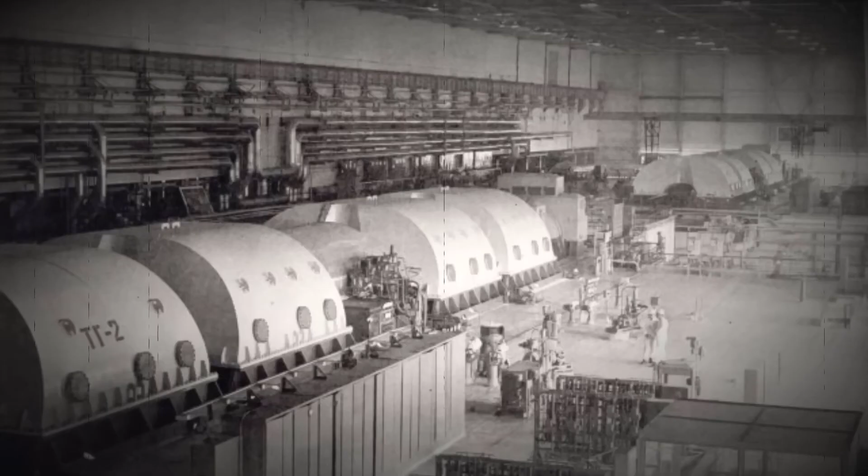The nuclear power plant had the first of its 4 reactors ready to operate in 1977, followed by number 2 in 1978. As a quick side note, Units 1 and 2 were the first generation RBMK-1000 reactors, and because of this they had slightly different core loadings and containment structures.

But the remaining 2 reactors at Chernobyl were of a slightly more modern second generation, named Units 3 and 4, which went online in 1981 and 1983 respectively. There were plans for another 2 units, but these were abandoned after 1986 when risks of contamination left the project untenable.

The nameplate capacity of Chernobyl Nuclear Power Plant was: Unit 1 at 1000 megawatts of electricity, Unit 2 at 1000 megawatts of electricity, Unit 3 also at 1000 megawatts, and the same with Unit 4.

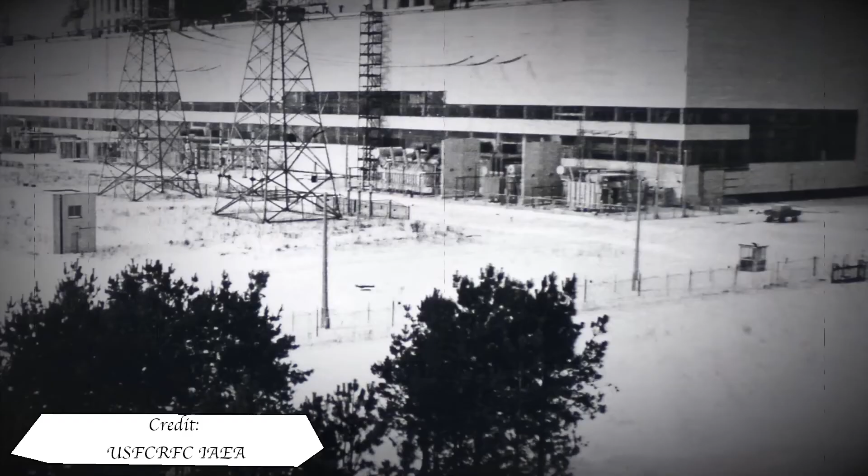In this video, I'll be focusing on the second generation RBMK, its design, and more specifically Unit 4. But I did look into the first generation in the Leningrad video.

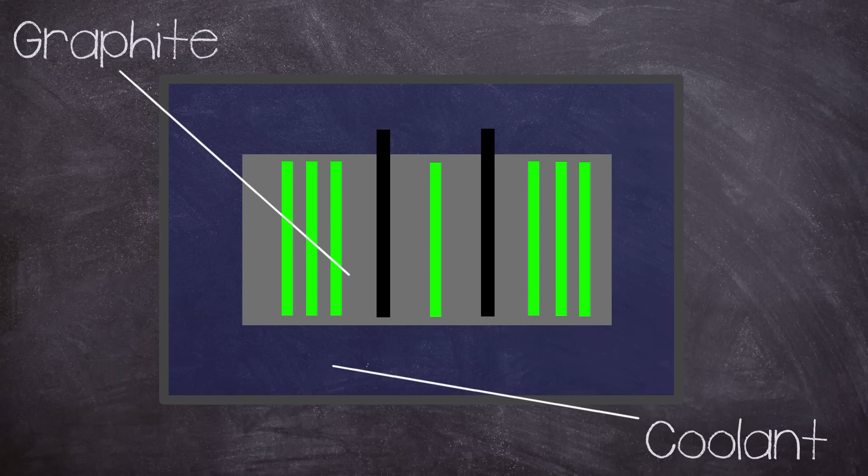The RBMK was a bit of a unique design in the reactor world, but it was a product of evolution rather than revolution, in that it used graphite to moderate the chain reaction with light water as a coolant. This combination allowed it to use lower enrichment uranium-235 for fuel, which is, not surprisingly, significantly cheaper than other reactor designs.

The RBMK had a very large core region consisting of a height of 7 metres and a diameter of 11.8 metres, which was mounted in a steel cylinder that was placed on top of a biological shield.

The steel cylinder was 16mm thick and had a diameter of 14.52 metres by a height of 9.75 metres, dug into the floor of the reactor building, inside a reinforced concrete lined pit.

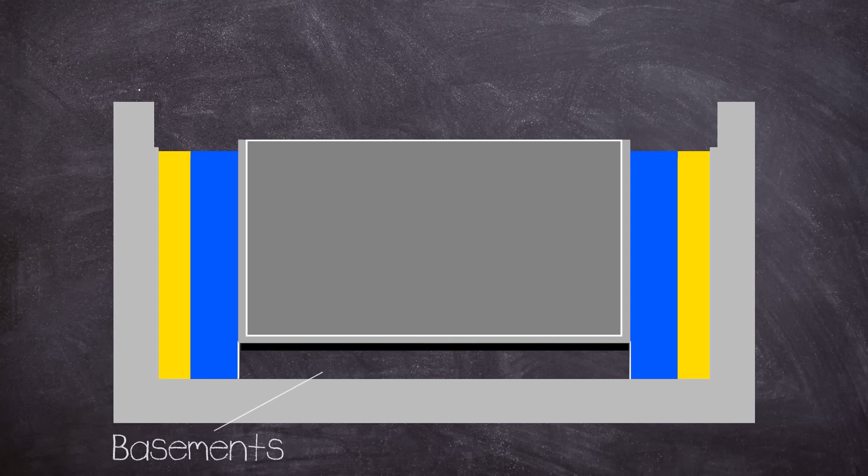Between the steel wall and the concrete lining, a water tank was placed, followed by a sand packing. Below the bottom biological shield, there were several basements used for pipework for the reactor core cooling loops.

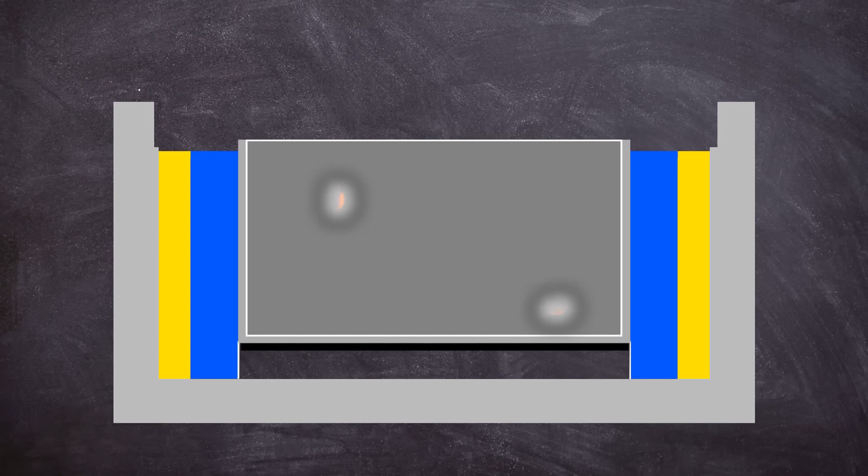The core consisted of graphite blocks sized 25 by 25 centimeters, stacked up with holes drilled through the center for fuel and control channels. The size of the core could cause issues in reactivity control during operation, but we will talk about that a bit later on.

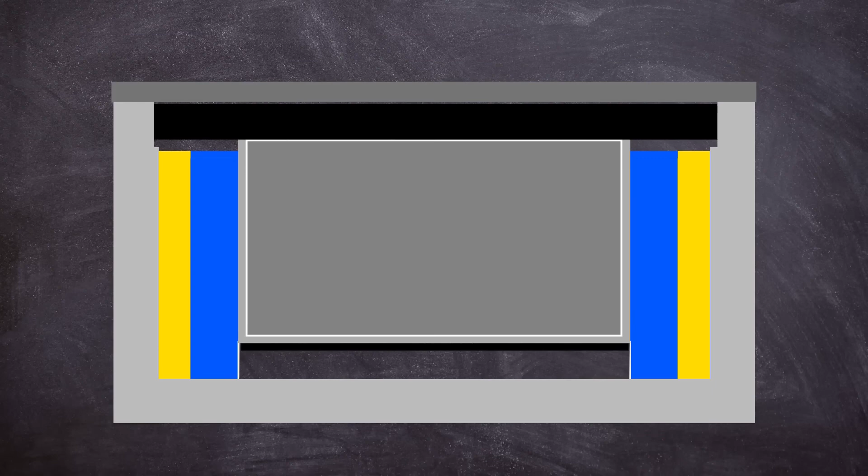On top of the core, another biological shield was placed with a steel cover on top of it, which formed the floor of the reactor hall. The cover plate was capable of withstanding a pressure build-up resulting from steam released by two simultaneous channel ruptures.

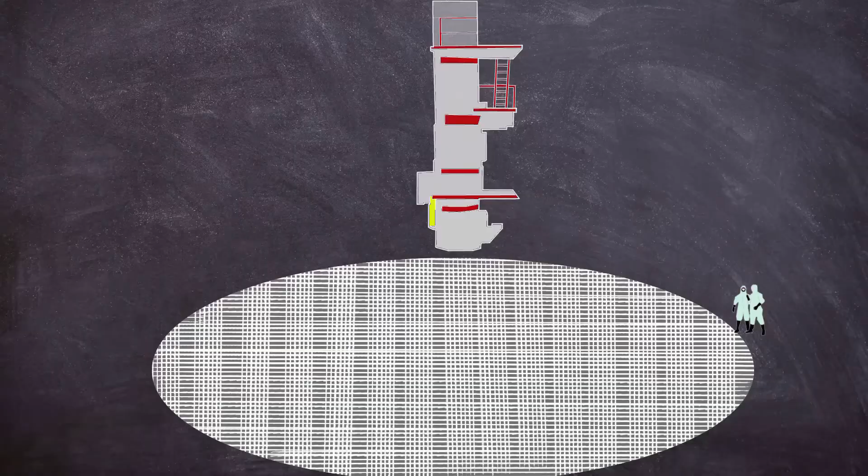All of this allowed the design to be refueled whilst in operation, which again helped with costs by reducing downtime. As a side effect of this, the confinement structure of RBMK reactors is less than ideal, as the tall refueling machine had to be housed inside the reactor hall. Because of the large floor space and subsequent roof requirements, the vast quantities of heavy concrete wouldn't have been architecturally, or more importantly, financially viable.

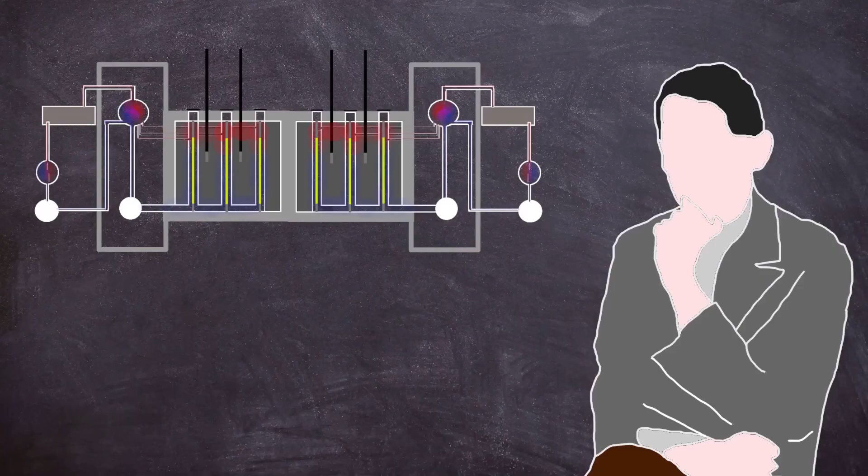The RBMK didn't have a prototype and was instead put straight into production, with the first reactor being installed in Leningrad in 1970. The original designs omitted confinement, instead claiming that the fuel being in its own channel with flowing cooling water was an acceptable alternative. The main takeaway from this is confinement was poor, resulting in disastrous results in the case of a fission product release.

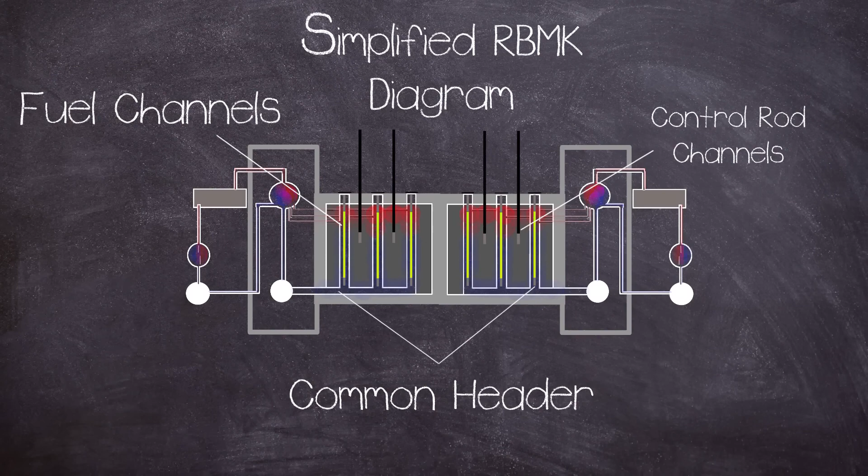The coolant was pumped through the core, from the bottom common header through high pressure tubes that jacketed the fuel elements, where the water would boil. Coolant water also circulated in the control rod channels. The primary cooling of the reactor was via two separate cooling circuits, one for each half of the core, meaning everything was doubled up, leading to four main circulating pumps, which were three operating, plus one standby per loop.

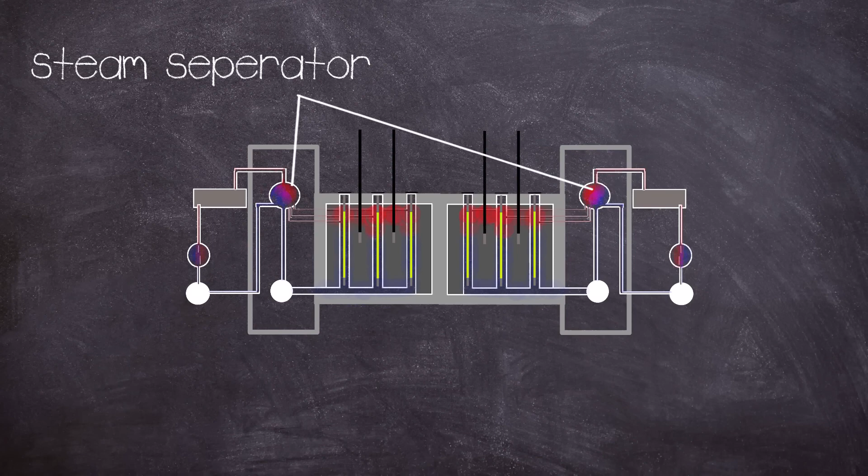As the coolant boils, it exits the top of the core and is passed through a water steam separator, which takes the steam to high then low pressure turbines which generate the electricity. The steam is then passed through a condenser that turns it back into water to be pumped back into the core, completing the primary cooling circuit. The condenser is cooled by using a separate secondary water cooling circuit, meaning the primary cooling circuit is self-contained.

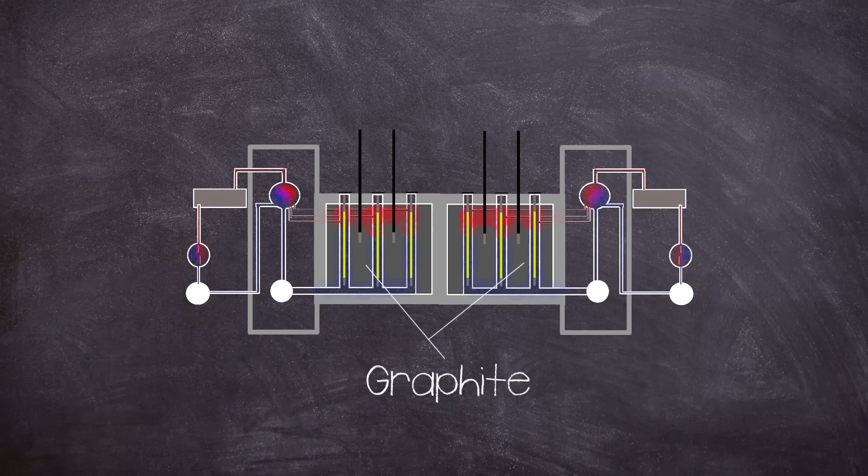As mentioned before, the reactor employed graphite blocks for its moderator. A moderator is used to reduce the speed of fast neutrons released from fission, so they can better facilitate a chain reaction, getting more use out of the fuel. Ideally, moderators work without capturing any neutrons, leaving them as thermal neutrons. But where the design has its potential flaw is having a separate coolant that can also absorb neutrons, which can make the reactor unstable in certain situations.

This brings up the big elephant in the room, and that is void coefficient. It wasn't just the graphite that had moderation characteristics, but the coolant water as well, because H2O naturally slows down and absorbs neutrons. This brings a problem for the reactor, as with the increase in temperature from fission, the coolant boils off into steam, known as voids, i.e. a bubble that does not absorb neutrons. With the steam not absorbing neutrons, this leads to an increase in the power of the reactor.

The RBMK did not rely solely on its coolant for moderation, because that's what the graphite was for, but the water did absorb neutrons, meaning that as it boiled off, the operators had to compensate for this with the control system. If not properly managed, an incident of a runaway can happen as the coolant heats up, increasing reactivity, heating up the coolant more, creating more steam, leading to greater reactivity, and this is called a feedback loop. During this reactor state, more and more neutrons are produced and their density grows exponentially fast, creating a positive void coefficient. The risks of a feedback loop were greater at certain power levels, but this will be covered later on.

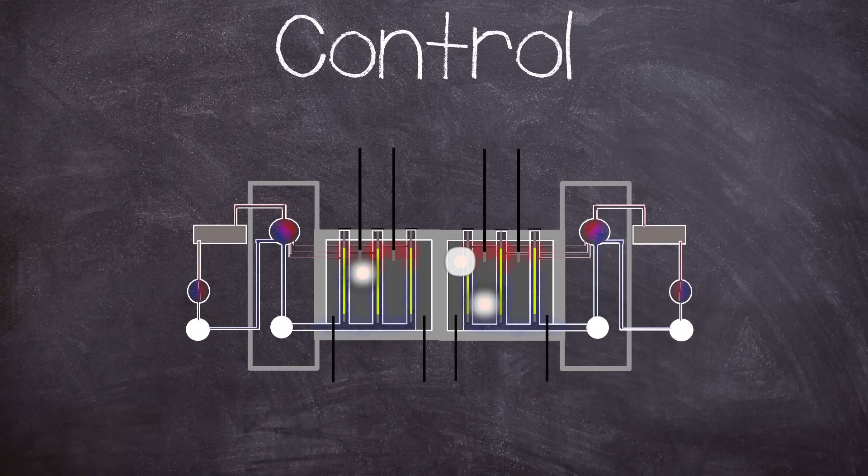Now this leads us quite neatly onto reactor control. As I said before, the core region was rather big, and this meant that the RBMK was kind of like multiple smaller reactors in that hotspots could occur which needed to be individually managed.

And this leads on to the strange design choice for both top-loaded and bottom-loaded control rods. There were 167 top-loaded rods and 32 shortened rods loaded via the bottom, and another 12 automatic controls inserted from the top.

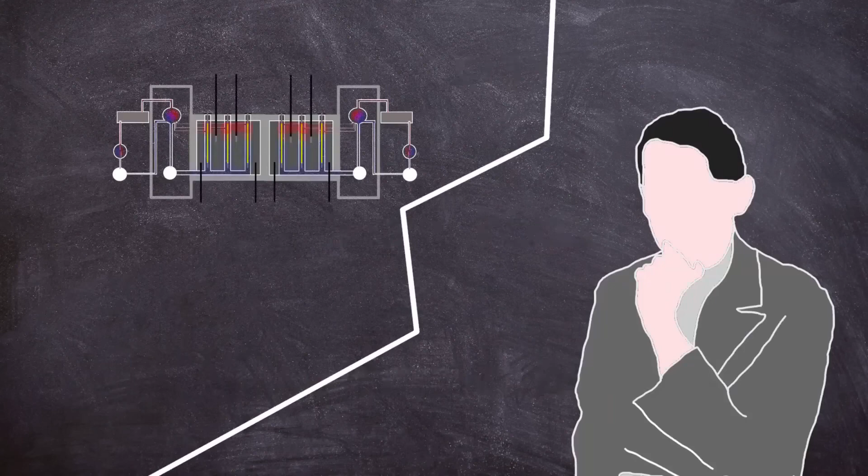The shortened rods were used to manage axial power distribution, which was necessary due to the core size to manage hotspots.

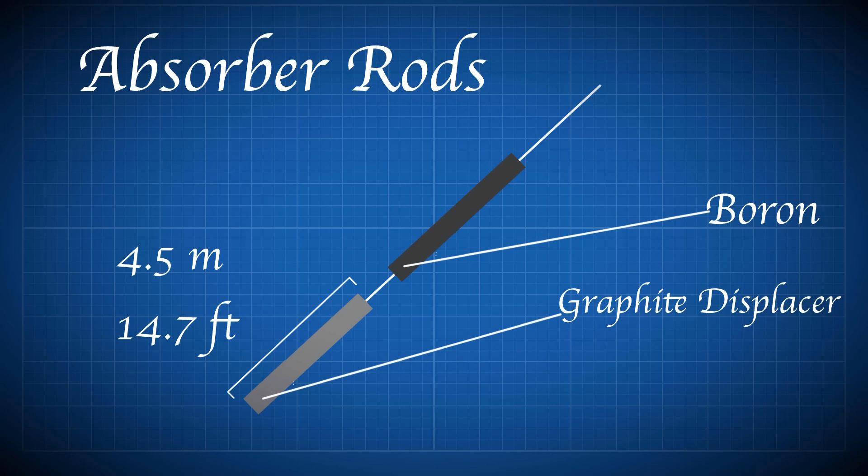The main control rods had a 4.5 metre long graphite rod termed a displacer attached to the end of the length of the control rods, except for the 12 rods that were used in automatic control.

The displacer connected to its rod via a telescope, with a water-filled space of 1.25 metres separating the displacer and absorbing rod. This was to stop water filling the space left behind by the control rod after it has left the core region, which would parasitically absorb neutrons.

Because removing one neutron absorber in the form of a boron control rod to be replaced by another neutron absorber, albeit weaker, in the form of H2O, kind of defeats the point of a control rod. Thus, if there was no displacer, then more control rods would be needed, as each one would have less of an effect on the reactivity of the core.

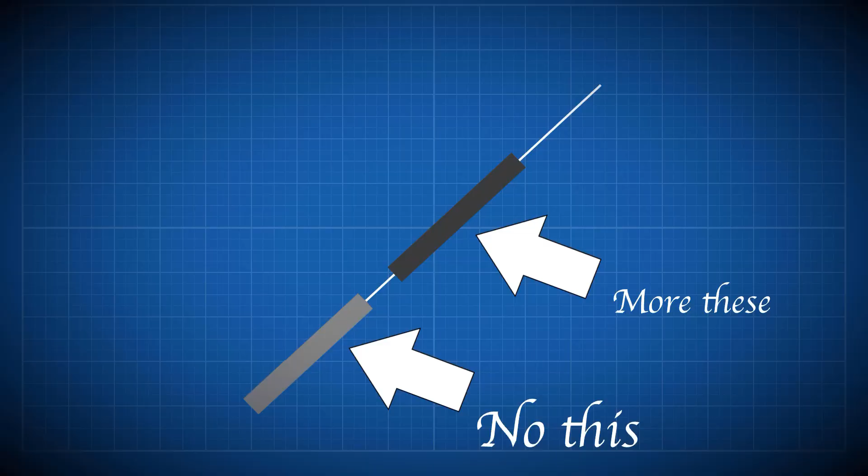The dimensions of the rod and displacer were that, when the control rod was fully extracted, the displacer sat centrally within the fueled region of the core, with 1.25 metres of water at either end. But this setup in certain situations could cause a positive scram effect.

On receipt of a scram signal causing a fully withdrawn rod to fall, water was displaced from the lower part of the channel as the rod moved downwards. This caused a localised insertion of positive reactivity in the lower part of the core.

This was because the RBMK had a high moderator to fuel ratio, meaning the lower part of the core would experience a spike in reactivity as the graphite displacer entered it, as it replaced the neutron absorbing water with a neutron moderating graphite. But this situation was only dangerous at certain power levels of the reactor, which was meant to be mitigated by the knowledge and training of the operators, and also importantly by their management.

Part of this mitigation was by having an operating reactivity margin. The ORM is the number of equivalent control rods of nominal worth remaining in the core.

The total time required for a scram, or insertion of the emergency control rods into the core when starting from the upper limit stop switches, was around 18 seconds, which was relatively slow, but this was due to the size of the control rod channels and the fact that the coolant had to be pushed out of the way.

The scram could be initiated by the control system or manually via the AZ5 button.

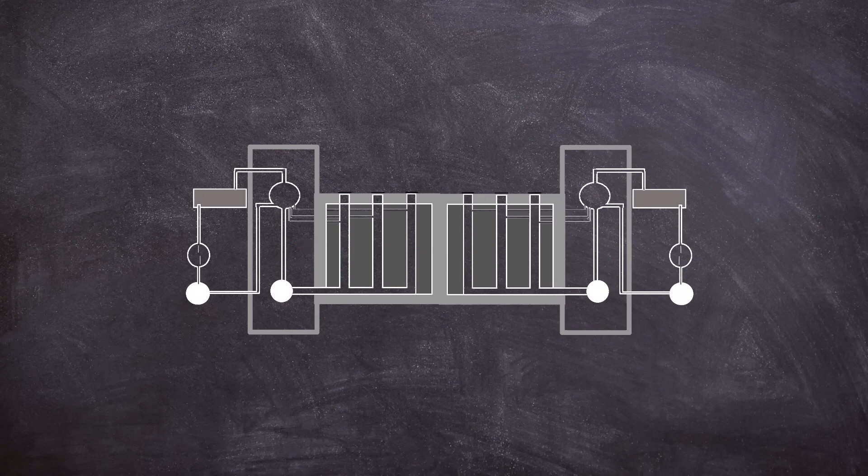This meant that low power operation below 10% had to be done by the operators relying on experience and feel when monitoring the equipment. But manual low power control was only really intended for a cold startup, so to speak, when the reactor was free of the neutron absorbing poison xenon-135.

Right, I need to mention about neutron poison, as it will play a vital part later on, and was also a contributory factor in another RBMK incident, the meltdown in Leningrad in 1975.

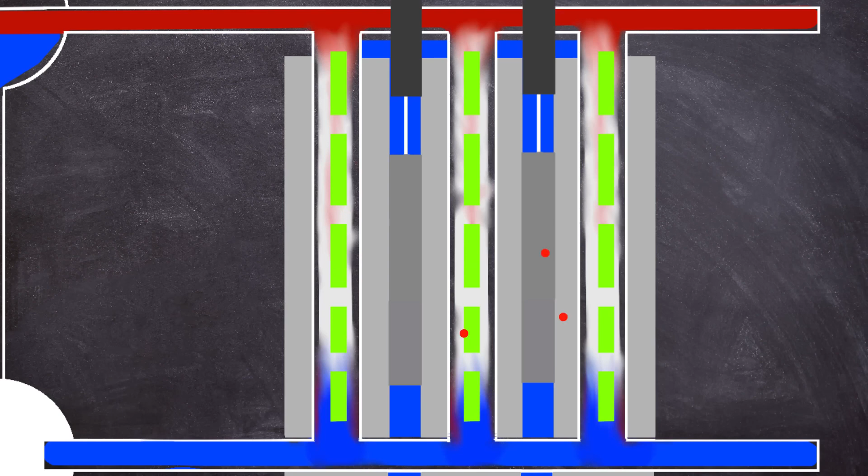During fission, some products are given off, one of which is xenon-135, which has a high neutron absorption rate, which is okay when the reactor is in a steady state, as it burns off this undesired byproduct, as poison burning is proportional to reactor power.

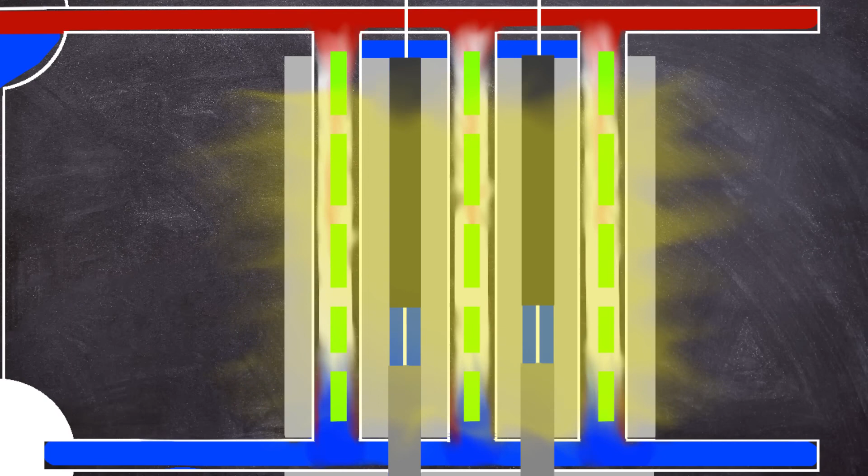But when the power of the reactor is decreased, the xenon-135 is not burned off, and can shut down the chain reaction by absorbing too many neutrons. This is known as an iodine pit.

All is not lost, as xenon-135 has a relatively short half-life of around 9.2 hours, so a reactor core is considered poison-free after several half-lives have passed. But this is not good from an economic standpoint, as the unit would be shut down for a few days.

Which is where good management is meant to come into effect, where safety is prioritised over money, but in the former USSR, taking a reactor out of action for a few days could have a detrimental effect on one's career longevity.

Our story starts with an issue inherent to all reactors of any type, a thing called decay heat. You see, reactors produce heat from fission, which is used to create steam to drive the turbines for electrical power. Some of this power is taken to drive the electronically operated coolant pumps, which keep the coolant flowing through the core. The reactor needs around 28,000 cubic metres per hour during full power operation.

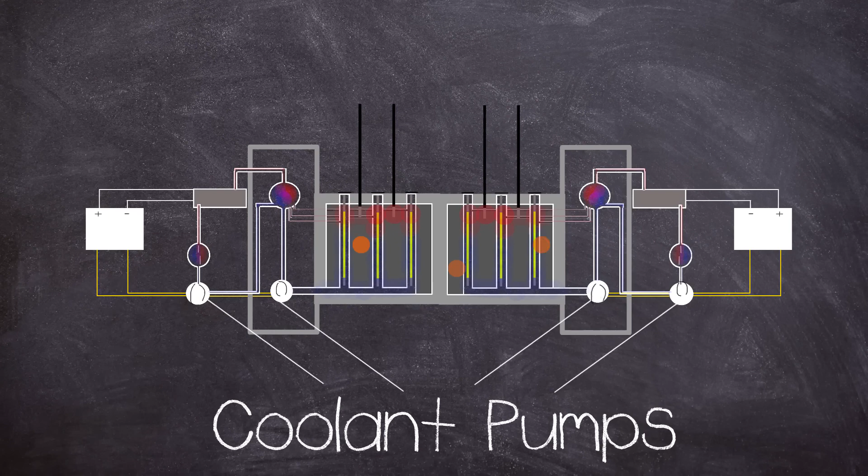Some heat is produced not directly from fission, but instead from the products produced from the chain reaction, and this is known as decay heat.

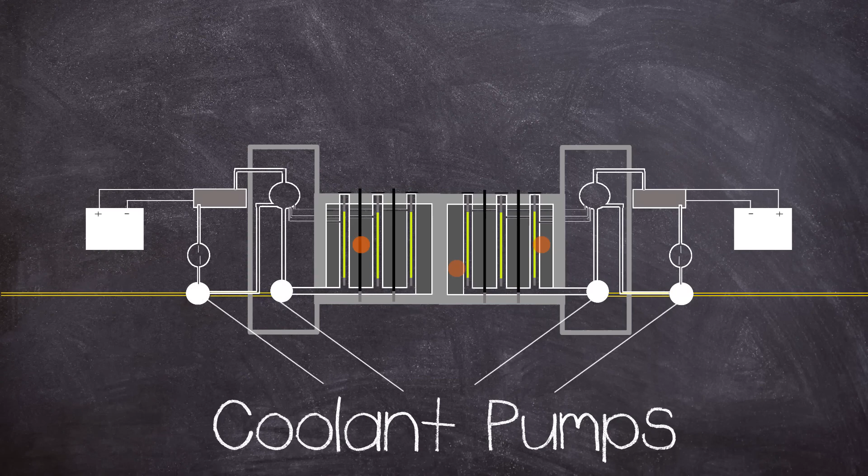And when the reaction stops, this continues, at least for a while after shutdown. During power operation, this is fine as electricity is being produced, but after shutdown, the pumps need to keep circulating to remove the decay heat. Usually the electricity needed for the pumps can be drawn from the national grid. But what about if there is a full power outage?

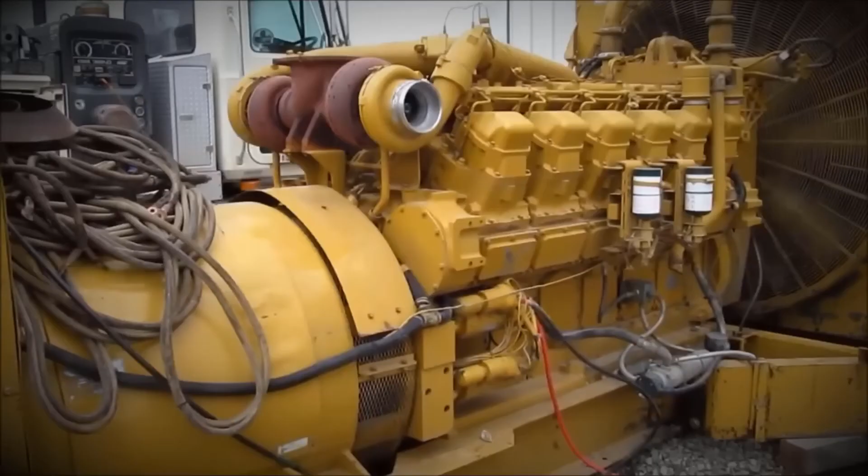Then backup is needed. This presents a problem. If for any reason, being scheduled or not, a reactor is shut down and there is a power cut, how will the pumps keep working? Well, the solution is pretty simple, and that is a diesel backup generator.

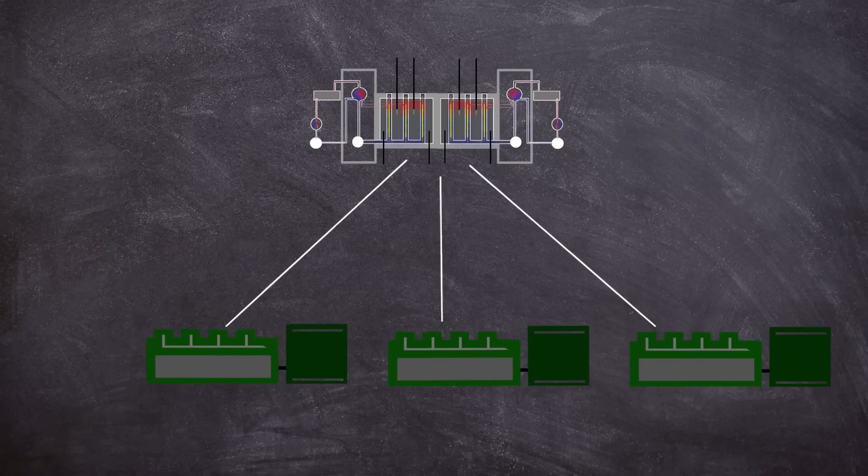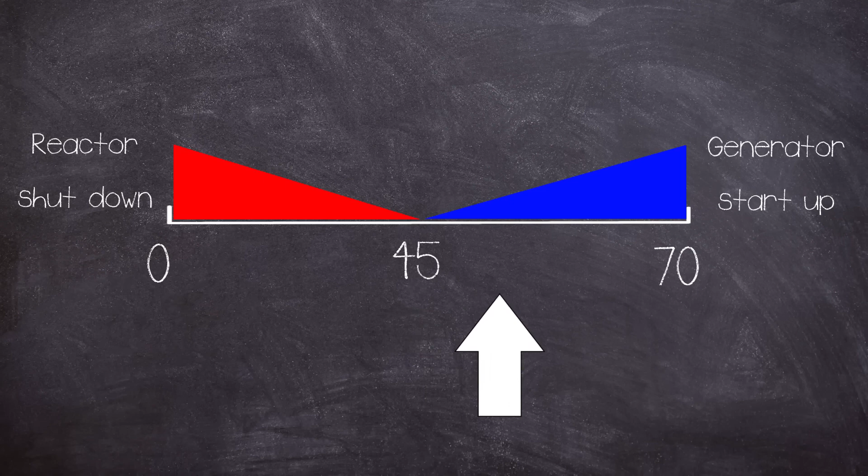Each of Chernobyl's reactors had 3 backup diesel generators, which took in excess of 70 seconds to reach full power. Too much time in the event of a full power cut. In theory, some of this time could be covered by the spool down of the turbo generators, which was theorised to cover around 45 seconds. Not the full time needed, but possibly enough to prevent fuel melting.

To prove that this could work, it had to be tested out, and in 1982, 1984 and 1985 this was attempted, but all tests failed to produce the electricity needed to run the pumps. The test was to be conducted again in April 1986.

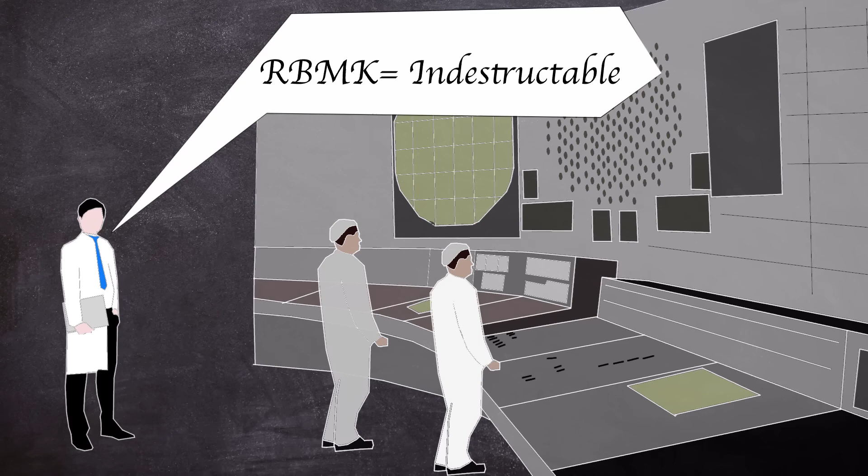Strangely, the test procedure that was written hadn't taken into account the eccentricities of the RBMK reactor, especially at low power outputs. The test was to be conducted during a routine shutdown. For the test to go ahead, some vital systems had to be switched off, most notably the active-passive emergency cooling system used in a loss of cooling accident. This required the chief engineer to sign it off.

In preparation for the test, the following had to be set up. The reactor power was to be reduced to between 700 and 1000 megawatts of thermal energy, and the steam turbine generator was to be at normal operating speed.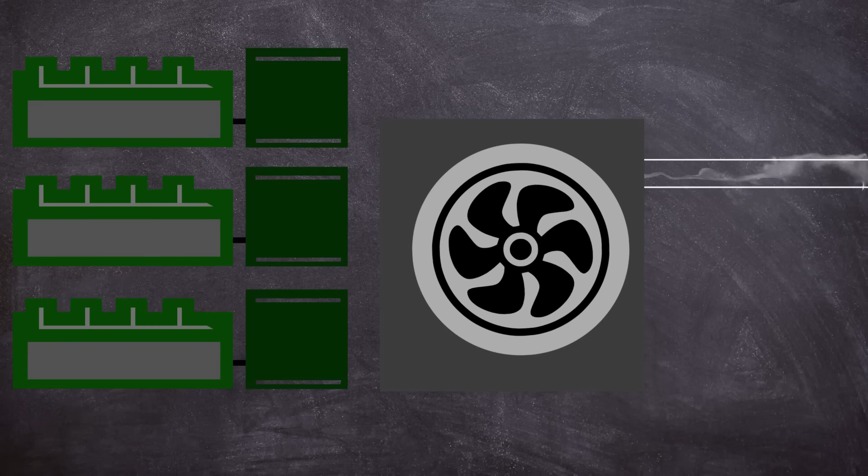After all this was sorted, the preparations for the electrical test could go ahead. The steam supply to the turbine generator would be closed off. The turbine generator performance would then be monitored to see if it could bridge the power for coolant pumps until the emergency diesel generators took over. When the emergency generators supply electrical power, the turbine generator will be allowed to continue freewheeling down. The normal planned shutdown procedure of the reactor was then to be completed.

The date of the test was to be the 25th of April 1986, 15 minutes past 2 p.m, completed by the day shift. As such, the operators were briefed on the procedure and a team of electrical engineers was present. At around 1 a.m. on the 25th of April, the reactor was gradually powered down to around 50%, in time for the day shift.

At 1:05 p.m, the turbo generator TG7 was switched off. The 4 main circulating pumps, 2 electrical feed water pumps and other electrical equipment that was connected with this turbo generator were switched over to bus bars for the turbo generator TG8.

The ECCS was disabled with the correct authorization from the chief engineer, but just after 2 p.m, the Kiev electrical controller asked for the test to be postponed to cover the evening electrical peak demand. The request was due to another power station in the region unexpectedly going offline. Chernobyl's director agreed and the test was pushed back, but the ECCS was not reinstated.

The status of the ECCS showed the lack of safety culture at the plant. Although the system wouldn't really be a factor in a disaster, it highlights the management culture at the time.

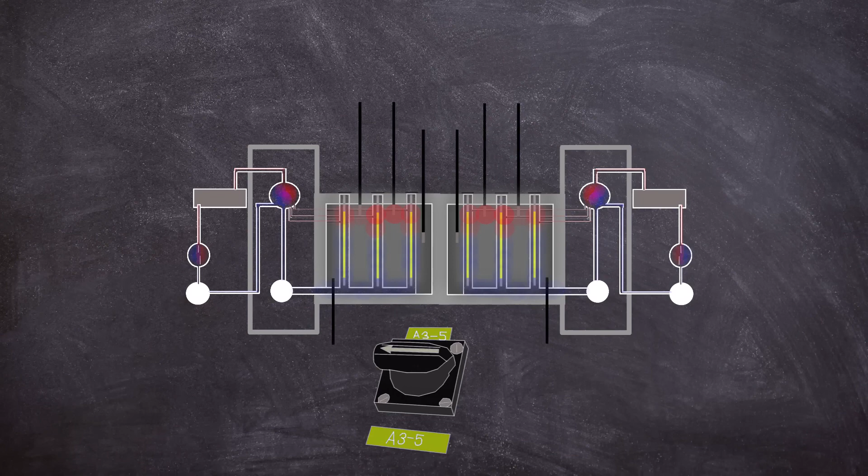At 1:23 in the morning, the actual test had now begun. The command given to stop the valves for turbine number 8 closed and the rundown operation started. As the turbines spooled down, the power to the feed water pumps slowed, increasing the temperature of the coolant, creating more voids. With less water absorbing neutrons, the power of the reactor began to rise.

A feedback loop was beginning to start in the lower part of the reactor core. The operators pressed the AZ5 button in response to the worrying increase in power, and the control rods started their travel into the reactor core.

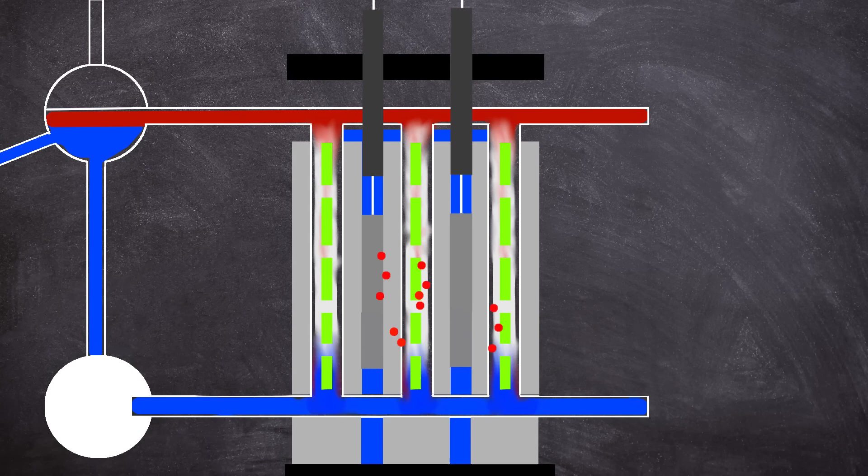As the control rod attached graphite displacers moved down to the lower part of the core in their control channels, the neutron absorbing water was pushed out of the way, creating a momentary spike in power, replacing it with neutron moderating graphite. During the spike, some of the fuel rods ruptured, blocking the control rod columns, stopping the control rods

at 1/3 insertion. This left the graphite water displacers stuck in the lower part of the core, increasing the runaway power excursion. Within 3 seconds, the reactor power rose to 530 megawatts of thermal energy. In the control room, a few shocks were felt, and the control rod indicators showed that the insertion had stopped.

As the channel pipes began to rupture, mass steam generation occurred as a result of depressurization of the reactor cooling circuit. Fission materials leaked into the coolant, and steam pressure grew inside the core as the coolant boiled off, creating a greater neutron population. The reactor power hit 30,000 megawatts of thermal energy, although it is thought that the power could have gone much higher than that during the excursion.

The steam blew off the top steel cover and top biological shield of the reactor as more than the 2 designed fuel channels failed, releasing debris into the reactor building. This was what would later be described as the first explosion, but it would not be the last.

A second, more powerful explosion occurred between 2 and 3 seconds later, and this destroyed the roof and ejected superheated pieces of graphite out of the reactor hull, peppering the area around the building with shrapnel. Some red-hot material fell onto the roof of the machine hall and started a fire. It is thought that around 25% of the core material was ejected.

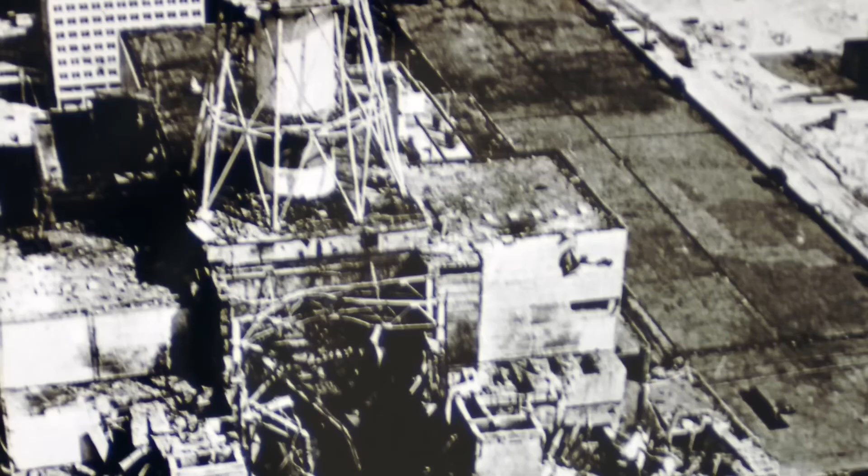Some of the debris that was ejected started a fire on the roof of Reactor 3's building, but insanely the unit wasn't shut down straight away.

Instead, the operators were told to take iodine tablets and don respirators. At 1:45 in the morning, the first responders from the Chernobyl fire team arrived under the command of Lieutenant Vladimir Pravik and began trying to extinguish the flames on Unit 3's roof. All around them lay pieces of Unit 4's graphite core.

The firefighters were only aware of the fire, and because of this they didn't have any radiological protective clothing on. As they worked, they breathed in some of the fission material in the form of dust and were exposed to deadly radiation. Many would come down with acute radiation sickness shortly after. Some of the first responders felt a metallic taste in their mouths, similar to what others had reported post-exposure, for example from the victim of the Wood River Junction criticality.

The fires on the roofs of Units 3 and 4 were under control between 2:10 and 2:20 in the morning, and the fire was fully put out at 5 o'clock in the morning. However, the graphite fire in what was once Unit 4 continued to burn, expelling its radioactive plume of dust, steam and smoke into the atmosphere. The operators started to pump water into the core, but this did little to bring the situation under control.

The estimated dose of 5 to 6 Röntgens per second was experienced around some parts of the reactor building, equivalent to more than 20,000 Röntgens per hour—enough to give a lethal dose in minutes. Effective dosimeter monitoring of the operators was unavailable when the two 1000 Röntgen per second capable meters became inoperable. The only remaining meters maxed out at 0.001 Röntgens per second, which immediately read off the scale when used, meaning no one in the control room actually knew what dose they had received. The poor awareness of the dangers they were in left the operators believing that the core was still intact.

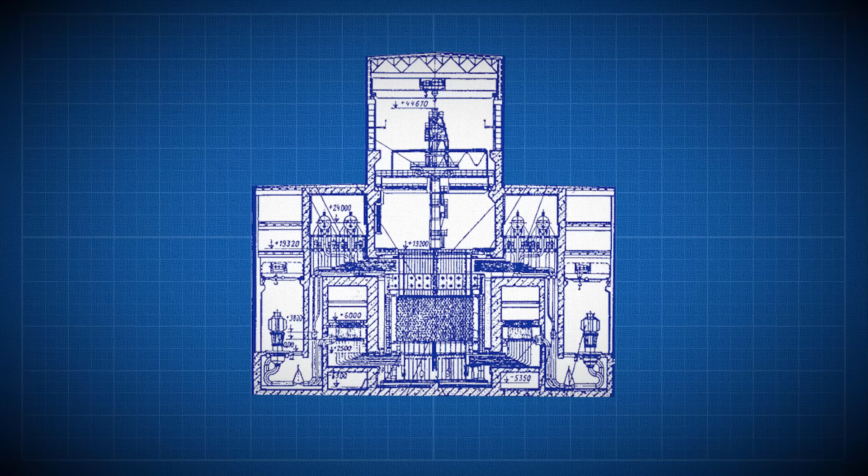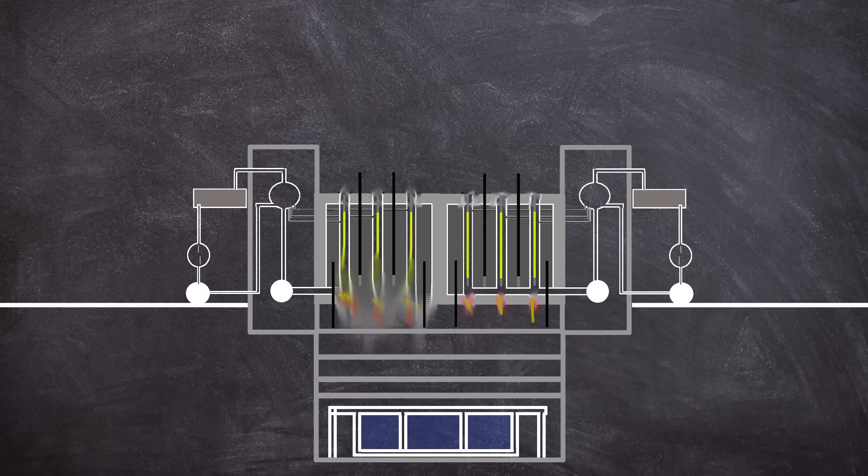Another steam explosion. The fuel from the core was melting towards the flooded basement. But below that was more water from the bubbler pools, a large water reservoir for the emergency cooling pumps and pressure suppression system.

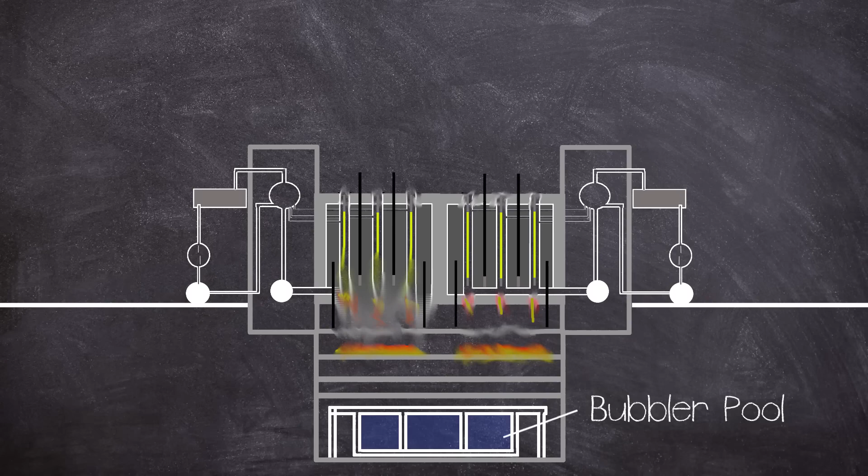Engineers Alexei Ananenko and Valeri Bezpalov, and supervisor Boris Baranov, volunteered to empty the bubbler pools. This was done by valves controlling sluice gates, housed in a room that had now become flooded. All three men donned protective suits and breathing equipment and made their way down the corridor.

The men were successful and the bubbler pools began to empty. Surprisingly, all three survived, not only that day but continued to live long after the disaster, averting the immediate steam explosion. But that wasn't the end of the worry of a deadly explosion.

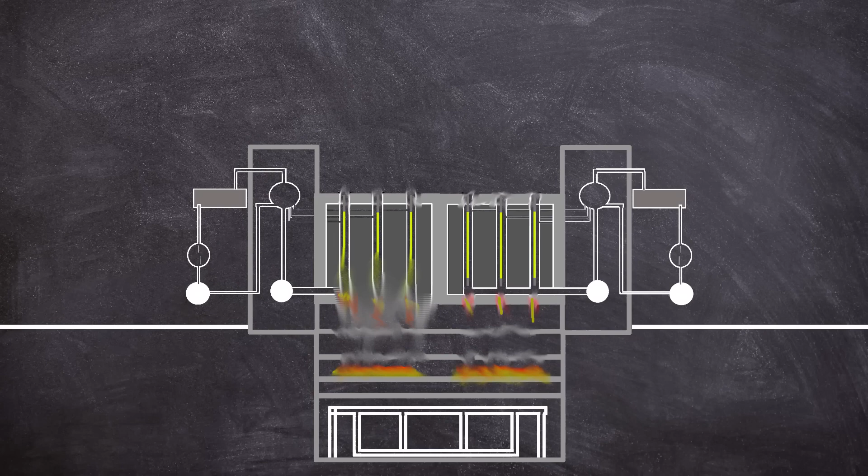As described in the film The China Syndrome, the core could continue to melt through the floor of the containment and into the earth, eventually hitting the water table, meaning another steam explosion.

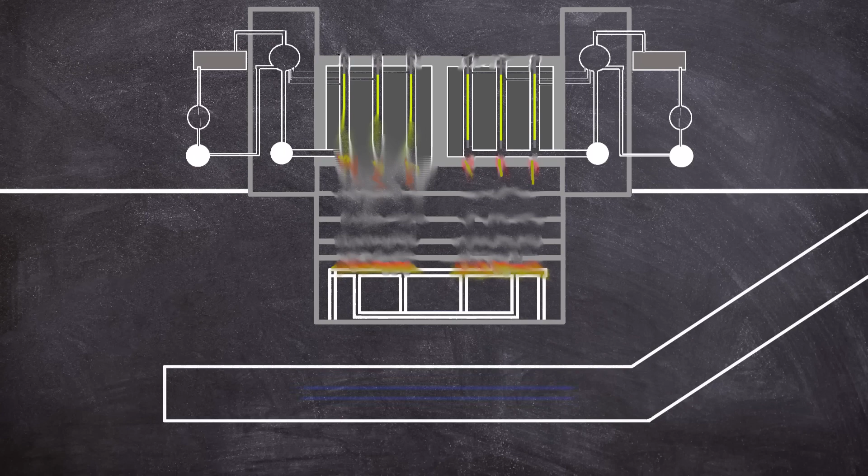The next focus of the accident management team was stopping the molten core from escaping the bottom of the reactor basement. A design thought up by physicist Leonid Bolshov involved digging out a cavity below the reactor building basement. The concept used a coiled formation of pipes cooled with water and covered on top with a thermally conductive graphite layer.

The graphite cooling plate was to be encapsulated between two sacrificial concrete layers, each one metre thick. In theory, as the molten uranium oxide hit the graphite, it was to rapidly cool down, catching the core meltdown.

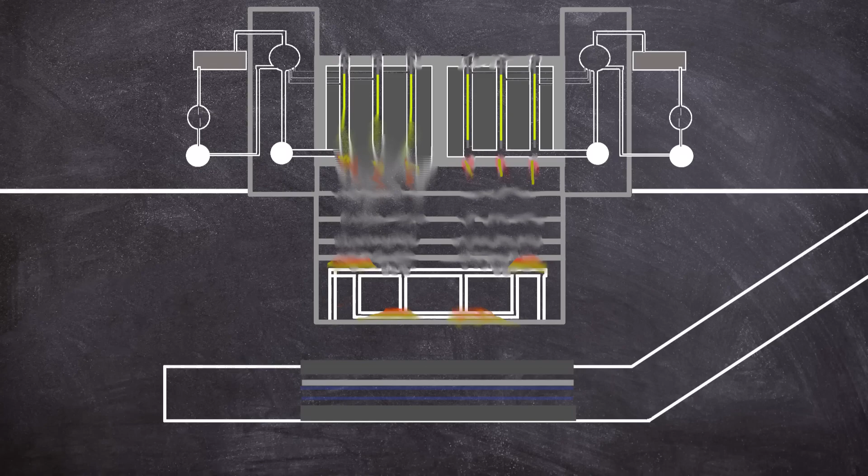Thankfully, the theory didn't have to be put into practice, as the core had finally come to rest in one of the lower basements of the reactor building, part of which formed the famous Elephant's Foot, discovered in December 1986, which had a radioactivity of 8,000 roentgens, or 80 grays per hour.

For reference, a whole body dose of around 5 grays can be lethal. The molten material is known as corium, a mixture of the material found inside the core, mainly made up of silicon dioxide with traces of uranium, graphite, zirconium and titanium.

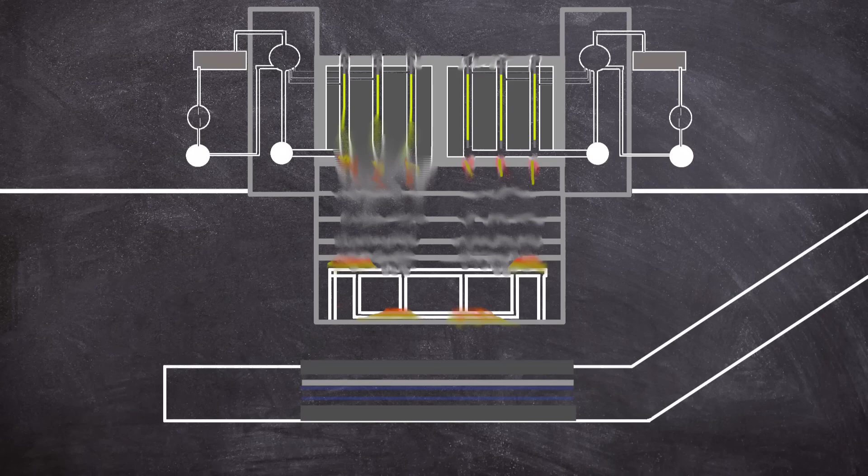The excavated cavity and cooling system, now unneeded, was filled with concrete to help the structural integrity of the heavily damaged reactor building.

A plan was conceived to contain the contamination release of Unit 4 in the form of a concrete lid, which would come to be known as the sarcophagus.

Construction began in May 1986, 24 days after the disaster, to encapsulate some 200 tonnes of radioactive corium, 30 tonnes of highly contaminated dust, and 16 tonnes of uranium and plutonium. The construction would last for 206 days, from June to late November of the same year.

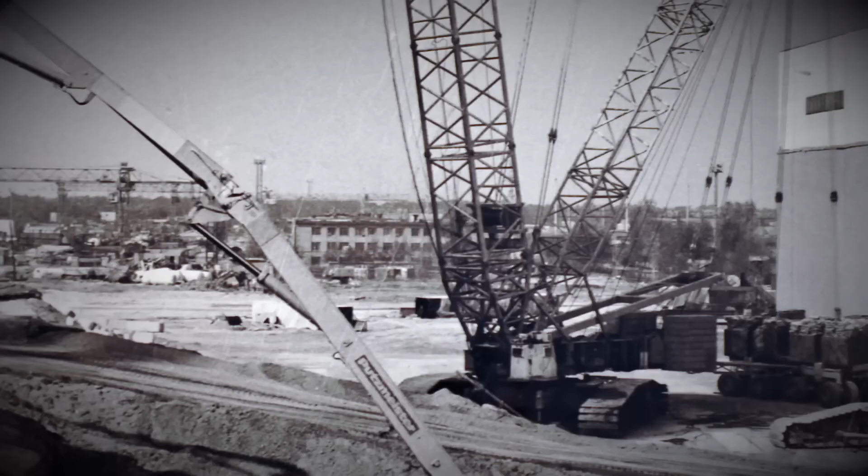But before the core could be enclosed under the sarcophagus, the next phase of remediation was to remove all the core material scattered across the area, and one of the most dangerous places was the roofs of the buildings surrounding Unit 4. Initially, robots were thought to be able to undertake the clearing works, but due to radiation interference, only around 10% of the debris could be recovered.

This necessitated the use of good old-fashioned people. The most basic of equipment was needed for the task, including protective clothing and a shovel. A total of 5,000 people, known as liquidators, were called upon to undertake the cleanup on the roof.

Each was only allowed between 45 to 90 seconds of total working time to reduce the risk of exposure. The calculated risk was 25 rem, or 250 millisieverts, of radiation per person. There were many more liquidators also used for other clearing up works in the wider area.

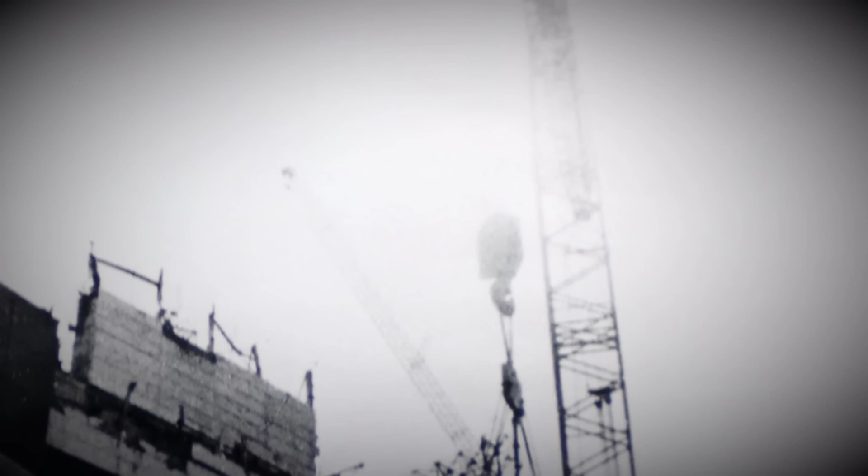And finally, after this, the sarcophagus could be closed over the turbine hall and reactor building. The construction was undertaken over 8 stages, all whilst Unit 4 released contamination, next to Unit 3, which still needed to be operable. Concrete containment walls were built around Unit 4, and a dividing wall was erected between it and Unit 3. The sarcophagus was placed on top of the concrete containment walls.

More than 400,000 cubic metres of concrete and 7,300 tonnes of metal were used during the construction of the sarcophagus. The building encapsulated an estimated 740,000 cubic metres of heavily contaminated debris together with contaminated soil.

Holes were installed in the structure to allow pressure release, albeit through a filtration system. The shelf life of the structure was only thought to be around 20 to 30 years, necessitating a new containment structure, but this will probably be covered in the next video in this series.

So, with an official death toll of 31, a nuclear power plant essentially unusable, and many decades ahead of remediation works, how was Unit 4 allowed to be operated in such a dangerous state? Unsurprisingly, it comes down to management.

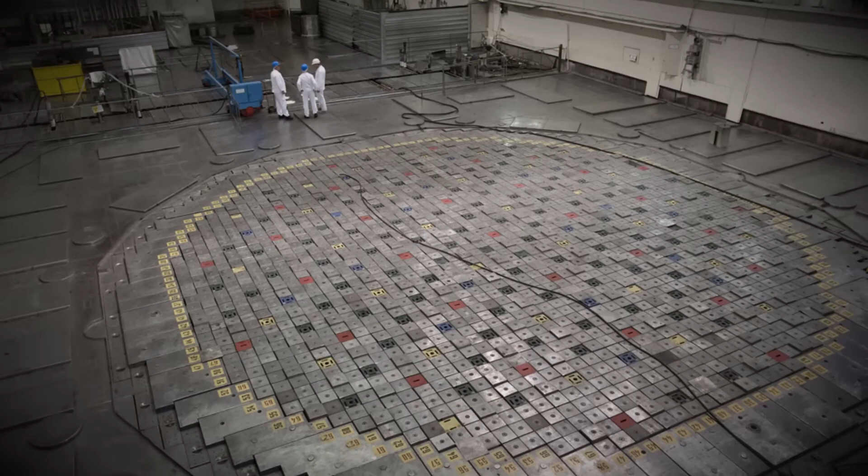The warning signs of the potential for fuel damage in an RBMK-1000 reactor reared their heads several times through the reactor type's history. A partial fuel melting in Leningrad over 10 years before, in 1975, had been covered up, and information was not passed on to other RBMK operational staff at different power plants. Again, the fuel melting incident that happened in 1982 at Chernobyl Unit 1 was also covered up, this time by Viktor Brukhanov, meaning lessons again were not passed on.

The risks of a positive effect of scram causing a power spike were known in December 1983 at Ignalina Unit 1. Unlike other incidents involving RBMKs, the information from the event was passed on to other plants, but was thought to have not been important enough to act on, as the control rods didn't get stuck and did continue to stop the reaction. The IAEA was involved in the investigation into the disaster using the International Nuclear Safety Advisory Group.

Which had been created by the IAEA in 1985. All of the reports have never been able to categorically say for 100% what the cause of the core uncovering was, and there is much speculation as to whether the power excursion happened pre or post scram.

But operating the reactor in the state it was in meant that something was going to fail. Regardless of the inherent flawed designs of the RBMK, it was operated way out of the agreed parameters, even set by the lax Soviet nuclear industry.

It can be attributed to the culture of working where failure was not accepted and vital operating incidents were not learned from. As well as this, the design flaws were outright covered up and held back from the operators.

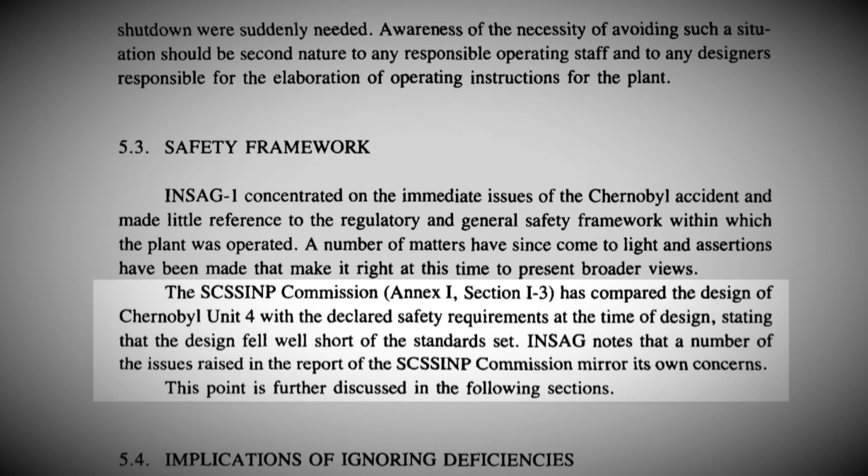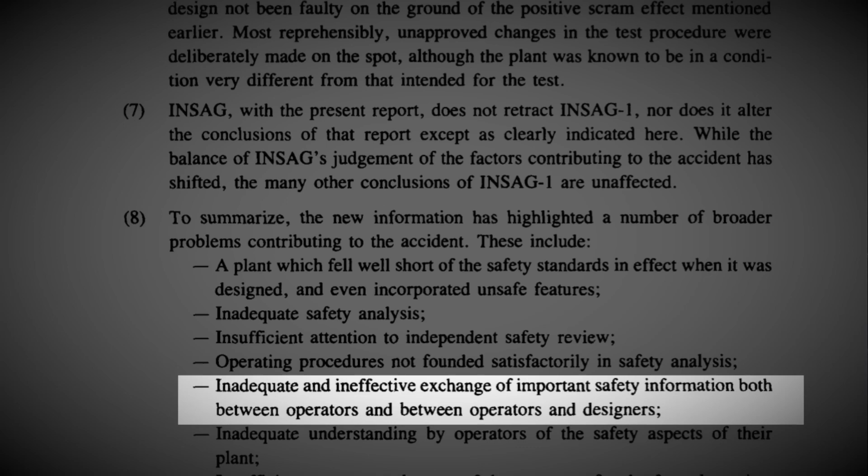This was all highlighted in the 1992 INSAG-7 report, which also said in its summary: the plant fell well short of the safety standards in effect when it was designed, and even incorporated unsafe features, compounded by inadequate and ineffective exchange of information between both operators and between operators and designers.

There was an inadequate understanding by operators of the safety aspects of their plant, also affected by insufficient respect on the part of the operators for the formal requirements of operational and test procedures.

The industry in the USSR had an insufficiently effective regulatory regime in place to counter pressures for production. The pressures from central government and lack of awareness of the design risks of the reactor meant that management acted dangerously in the false pretense that the RBMK was indestructible.

Pretty much the entire management structure was throwing around a grenade that they didn't know had the pin pulled out.